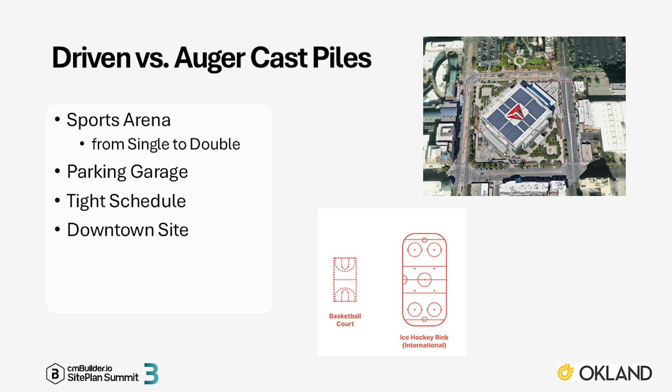We have a sports arena built in the 90s for basketball, for NBA. This owner just picked up a hockey team, and the hockey rink is a little bit bigger than the basketball court. So there's a fair amount of geometry that needs to change so that the fans can see the goal. There's a lot going on there.

In addition to that, the owner decided he wants a parking lot built over his loading dock. To say that a schedule is tight when you're dealing with a sports arena lacks in luster there, unless you have a quick call to the NBA or NHL to extend the season start date, which I haven't heard of anybody that does yet. And then you're also praying that they don't make the playoffs - like, please don't make the playoffs this year, because that just cuts into our time. And then it's downtown to boot.

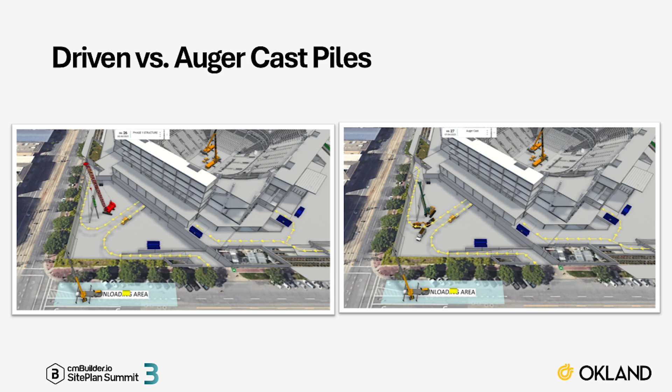So one of the things - it seems like you're in the middle of design when you start too. So it's like, hey, the deep foundations for the parking garage were still in the middle of design. They were debating on whether to go with auger cast piles or driven piles.

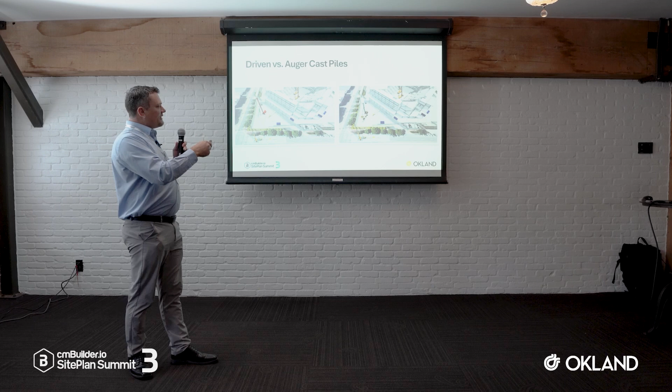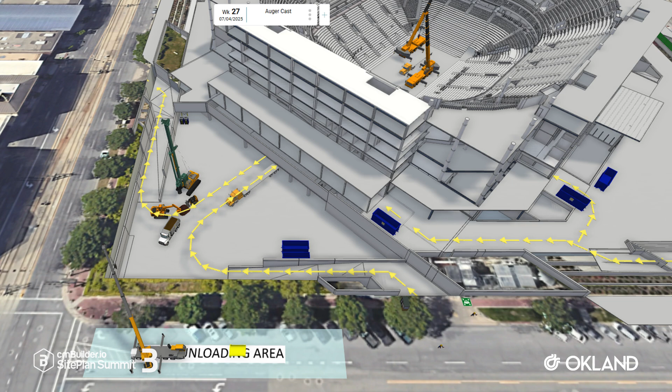Our superintendent with cmBuilder got in there, fired it up during an OAC meeting, and says, hey Mr. Owner, hey Mr. Design Team, here's the problem with your auger cast piles. In order to do this activity inside the arena, I've got to keep this pathway open - there's a lot of material going back and forth here. When we do auger cast piles, you're going to have a drill rig, a skid steer, a stockpile, a front end loader or excavator, and a dump truck taking up my space. I can't be doing that.

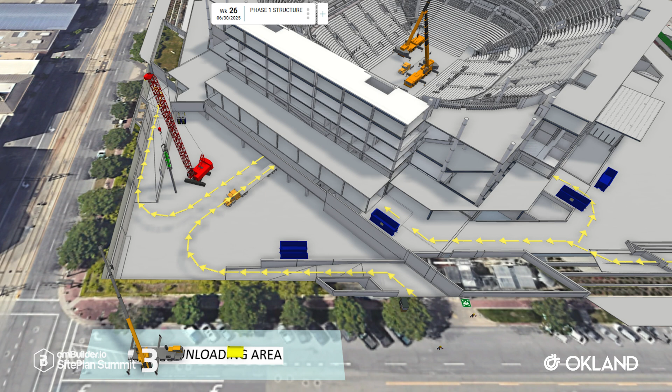Versus - and I apologize, it's small, can't really see, but if I had 3 more laser pointers I could point here and there too - versus a driven pile, and a quick shout out to cmBuilder, they were able to get this crane model with that driver on it within a couple days. Very, very efficient team there. But you can see how it opens up the space, and he's able to present that to the client and the design team.

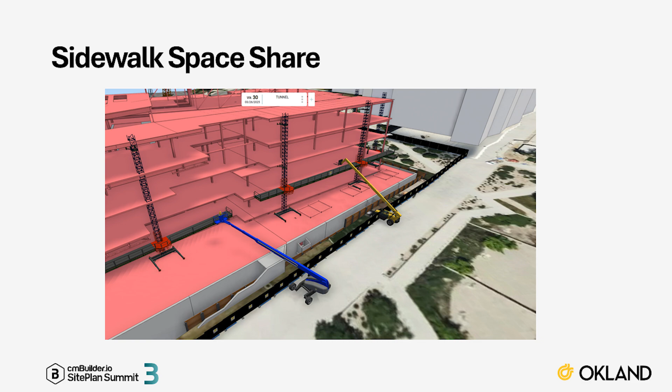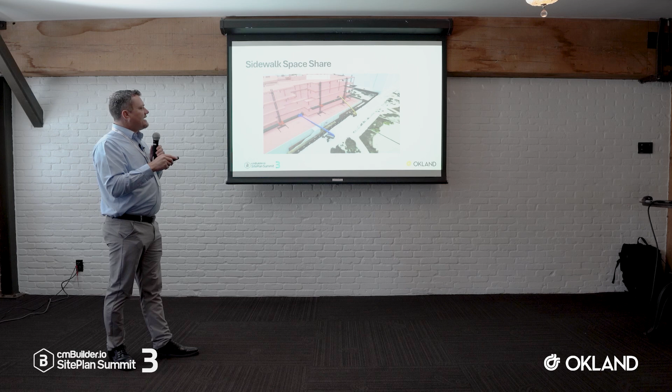He's saying, hey look, we have our structure fence, and we've got students traveling back and forth, and I'm not going to be able to load up construction material on my scaffold system. So during an OAC, he fires it up - he has a couple other visuals put together. We've got 25 feet here, and he says, hey look, if I can push my fence out here, I can give you 8-10 feet of student pathway and still get this access here.

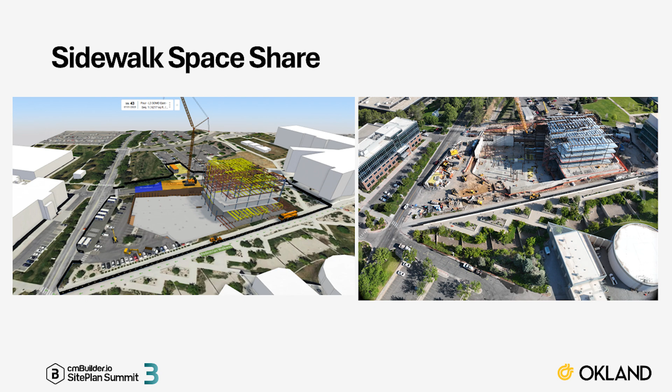Because he was able to give that visualization to go along with the demand, they said, well okay, we need 10 - we've got snow plows, we still got to get the snow out. But he was able to get that, communicate that, and now he has his access zone. Here's a drone picture showing that, and then what we had representing in cmBuilder.

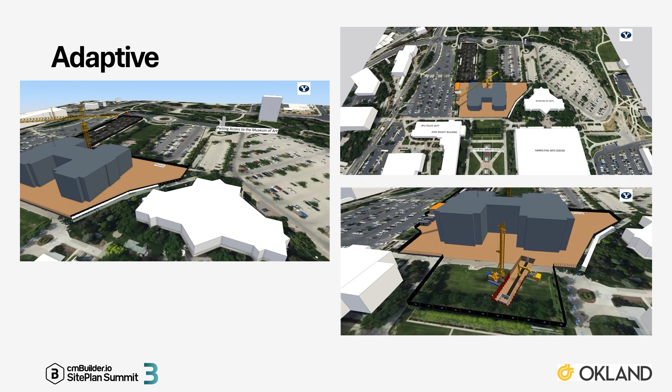Another thing that makes Builder really special for us is this story. A couple weeks ago, our pre-con BD director calls me. It's Wednesday, 4 o'clock in the afternoon, and he says, 'Hey, I need you to come to the boss's office.' I was like, 'Oh shit.' He's like, 'No, you're not getting fired, just come down here, we got a couple proposals we need to work on.'

So I go in there, and they're like, 'Hey, how long would it take to put a real clean 3D logistics plan together?' I was like, 'I don't know, 20 hours.' They're like, 'That's not going to work, the interview's on Friday.' I was like, 'Oh, okay.'

So I worked on it a little bit that night. We had an interview prep meeting on Thursday afternoon. I'm with the rest of the guys, they're prepping.

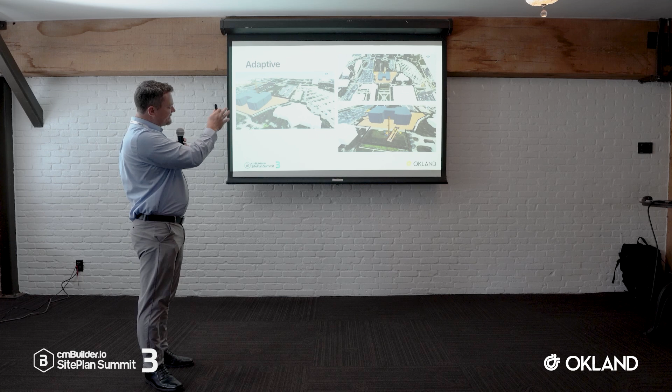You've got to be a talented person to talk to a 4D model, right? That takes a lot of prep and talent to have a video going and be able to speak to it. But our superintendents were able to speak to the 4D aspect of it. You know, 'Hey Mr. Owner, we got some lighted covered walkway here that we're going to protect.' The building is very preliminary, we didn't have anything coming in from the design team or anything like that, but it worked. Nobody really caught eye to it like, 'Oh man, that's ugly, it doesn't work.' It's like, 'Yeah, it's a building.' If you want a real clear, crisp representation, the design team's going to provide that for you.

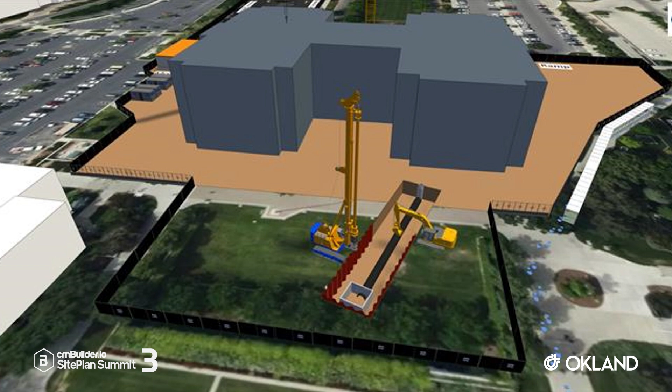Then in the meeting, they're looking at the RFP and saying, 'Hey look, on this side we got a deep utility we need, this thing's 30 feet down, so this is going to be a bit of a task.' We probably want to bring this up during the presentation, let the owner know, like, 'Right after you do your graduation ceremony in May, we're going to extend our construction fence, acquire this area, do this deep utility connection, and by the time your school season starts in August, we'll give this area right back to you.'

I was able to update this in 20, 30 minutes while we're prepping for the interview. Before, with what we were using, 3ds Max and Lumion, you're talking days in order to do that kind of work. So it's really been efficient for us.

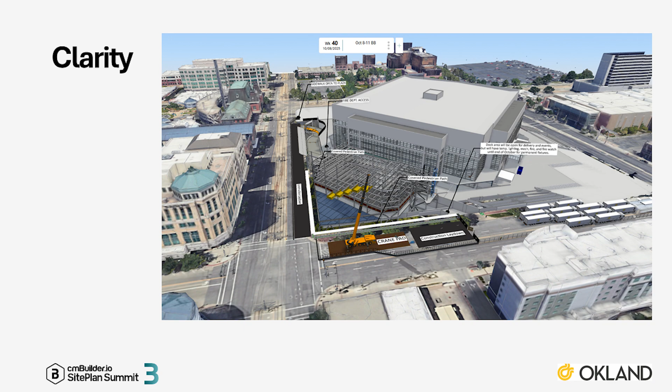Another use here, we're back to that arena. Come the start of the season, we're going to take this visual back to the city and say, 'Hey look, we're going to be looking for a temporary certificate of occupancy because we're going to start hosting events in there. We're still going to be working on the parking garage, so we're going to secure the parking garage work above it with the traffic going below it and the trucks coming in to load up the event floor.'

We're going to have our fire protection all done, our HVAC system all up and running. We're still going to be looking to take these two lanes, and we're going to have covered walk pedestrian access with flaggers. So it becomes that visual tool for the city to either yay or nay our TCO.

And then as well, we'll use the same or similar image to talk to the client and say, 'Hey look, you got Benson Boone coming into town on the 8th, he's got 26 trucks that come in with him. Let's make sure we have a conversation on where those are all going.'

So just the way it's been working for us is the quickness, the ease of use, the simpler tool, faster decisions. We're able to empower our superintendents, the ones that are willing to do it so far. I talked to Hensel Phelps, and having 700 guys trained up is pretty incredible, considering we only have 500. But the ones that have caught on have really used it to their benefit, and our safety managers as well, using it for their orientation, using it for their protection plans. Giving people the tools they need.